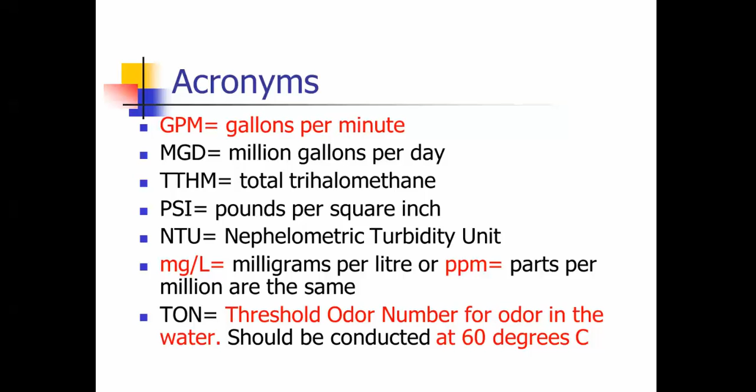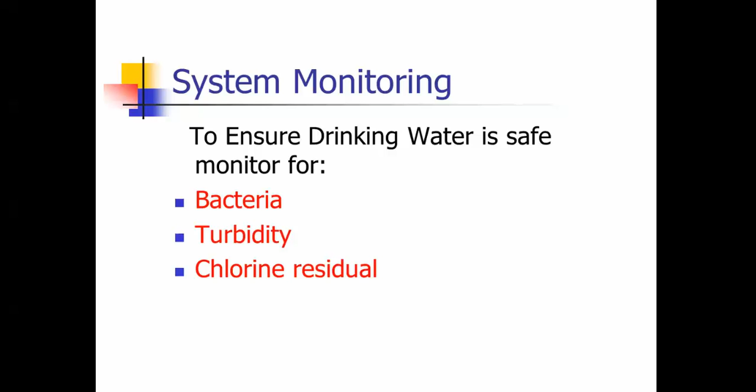When you're monitoring your system to ensure the water is safe, you're going to monitor it for bacteria, turbidity, and chlorine residual. When you take your samples, they should be filled just above the fill line, or about 1 inch from the top. That is a test question.

The bottles need to be sterilized by the lab and ready to use when you take them out into the field. The bottles have a powder in them that's sodium thiosulfate, and that powder is used to neutralize any chlorine in the water.

Your sampling procedures, you should allow the tap water to run for several minutes, or as long as necessary to clear the service line. Generally, when you get a glass of water in the morning, you put your finger under the water and wait till it gets cold, because colder water is better, but that's generally an indication that the water is coming from the distribution main.

You need to know that the results are meaningless if you contaminate the sample, so you don't want to even take the cap off your sample bottle until you're ready to take it, and you don't set the cap down on the ground or touch the inside of it. You want to keep that sample as sterile as possible, keeping your fingers and any contamination out of the cap or the bottle itself.

Make sure the identification cards are filled out completely.

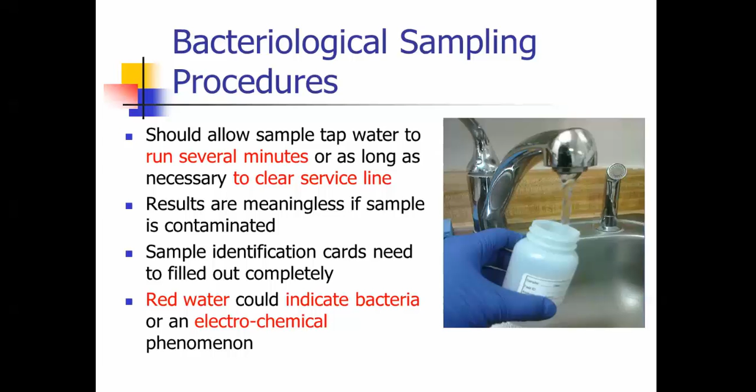And if you have red water, it could indicate bacteria, and could also indicate an electrochemical phenomenon going on in the water.

If you take a sample and the sample was okay, that only means it was safe at the point that you took the sample. They will test that sample for coliform, and that's an indicator of the presence of bacteria in the water. The absence of coliform in the water indicates the water is safe.

The sample should be transported as soon as possible in a cool container with an ice pack, and routine samples should be taken at the customer's tap at various points that represent the entire system. Make sure you also fill out your chain of custody forms completely.

I've got this sample tap over here, and that's not a good place to take a sample. If you'll notice, it's got a hose bib vacuum breaker on it, and there's threads, and those can harbor bacteria on the inside and will mess up your sample.

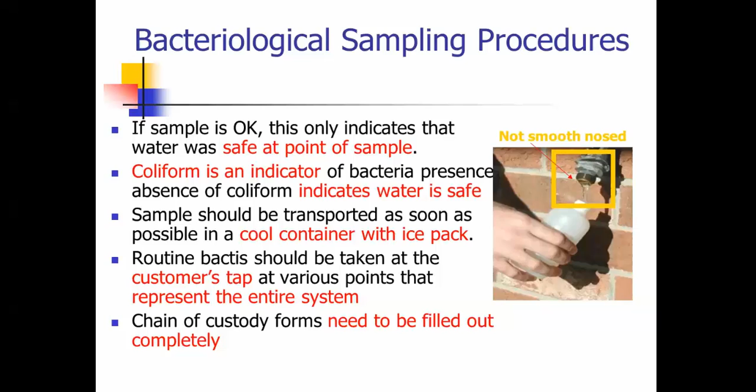Composite samples are a series of grab samples taken at the same sampling point and at different times, and they're mixed together. Grab samples represent instantaneous conditions at the time and location that the sample was taken.

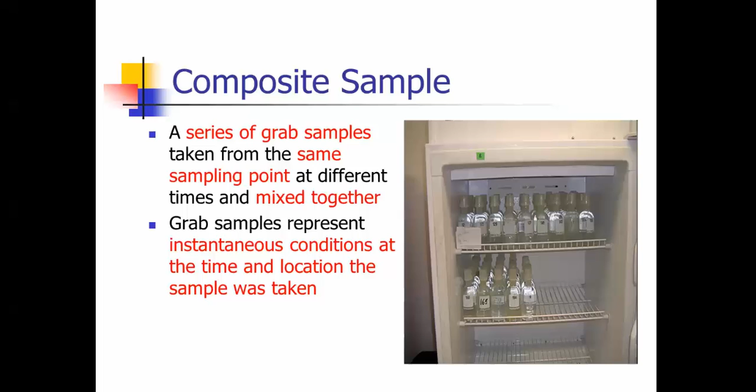Nitrates, we monitor for nitrates. Fertilizing lawns and farms can cause elevated levels of nitrates. They can also cause something known as blue baby syndrome, where the nitrates, if they get into your system, can rob your blood of oxygen, and babies are susceptible to suffocation from nitrates in the water.

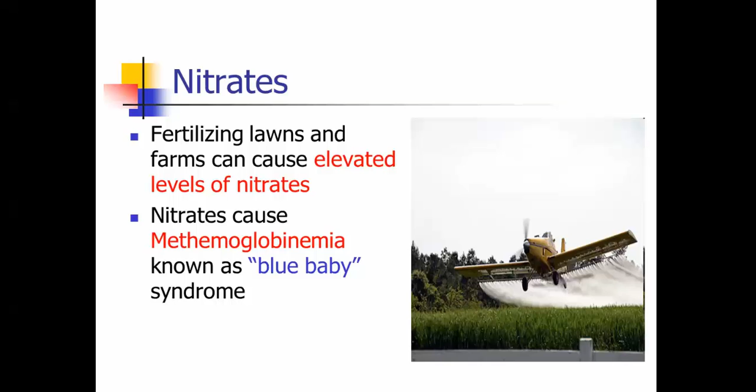NTUs, nephelometric turbidity units, that's the method used to measure the cloudiness of the water. The higher the NTU, the dirtier the water, and the greater the possibility of microbial contamination. Turbidity can mask the bacteria in the water - the bacteria can hide behind the turbidity so the chlorine or UV can't come in contact with it.

I compare this to the middle of summer when it's hot outside and you're trying to find shade to escape the sunlight. It's the same with bacteria - it tries to get in the shade to get away from it.

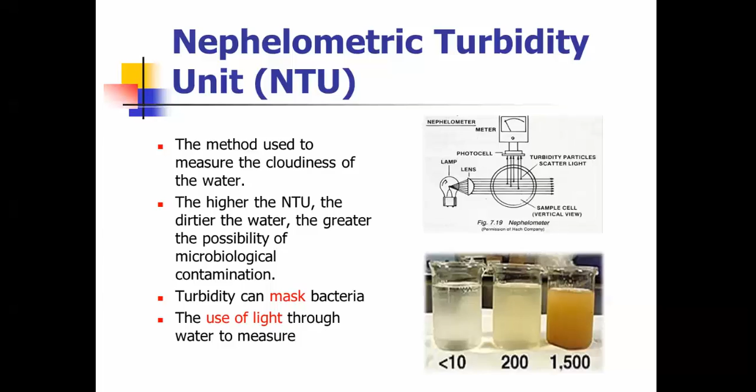They use light refraction to measure the turbidity in the water. Particle counters are a method used to measure the cloudiness of the water, the amount of particles, and the size of the particles. The dirtier the water, the greater the possibility of microbiological contamination.

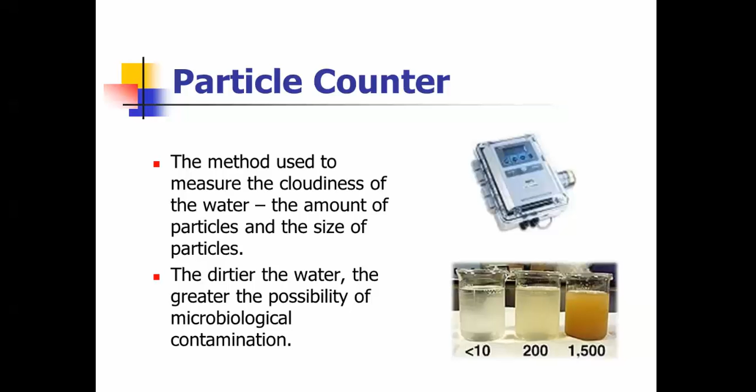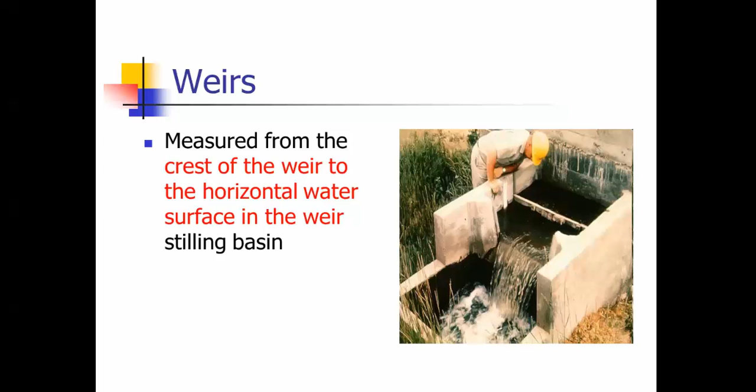Weirs, this is a test question that a lot of people have problems with. It's measured from the crest of the weir to the horizontal water surface in the weir stilling basin.

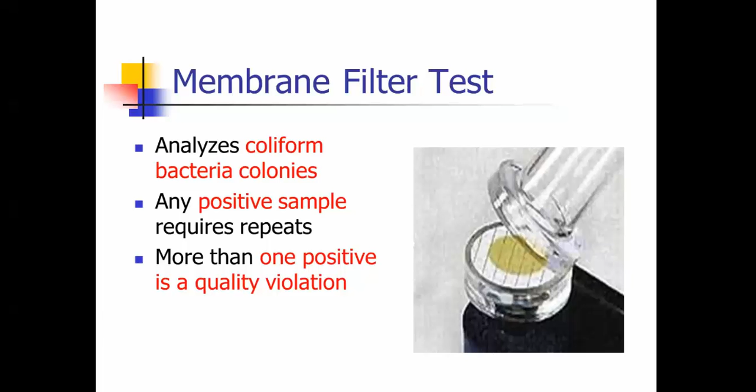The membrane filter test analyzes coliform bacteria colonies. Any positive sample requires repeats, and more than one positive sample is a quality violation.

The groundwater rule went into effect December 1st of 2009, and if you have coliform positive bacteria samples, it requires a triggered source water sample, from all of the sources that were in operation at the time of the coliform positive sample. You can email us on the sources not sampled that were not running at the time.

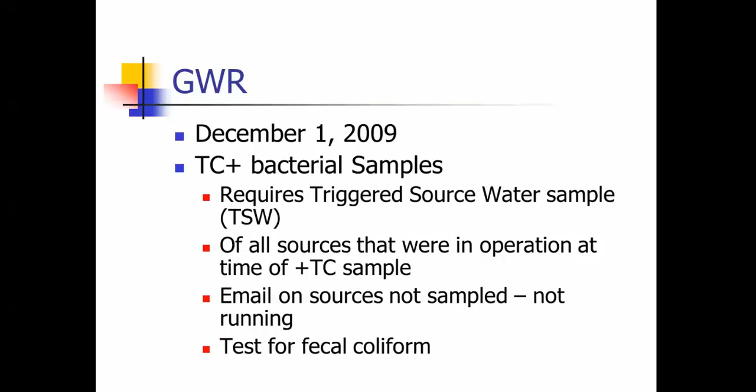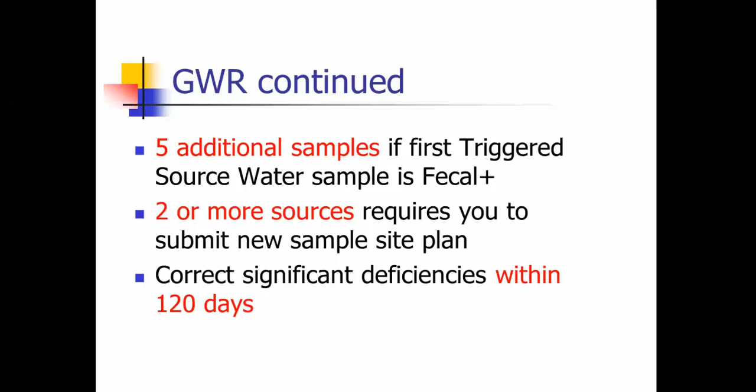Then you test for fecal coliform. If the first triggered source water sample is fecal positive, you need to take 5 additional samples. 2 or more sources requires you submit a new sample site plan, and you have to correct the deficiency within 120 days.

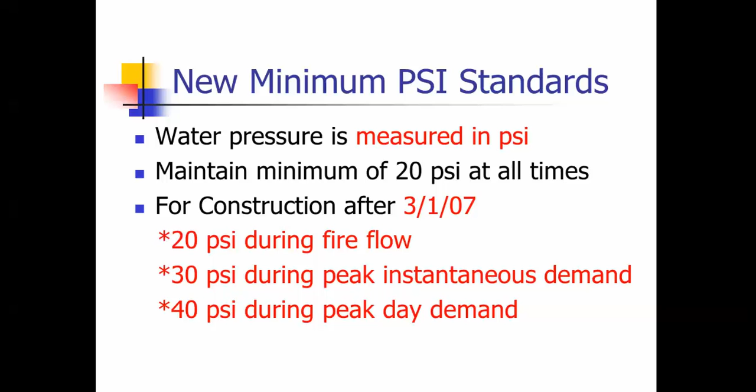The new minimum PSI standards, as of March 1st of 2007, are 20 pounds per square inch during a fire flow. You have to maintain the 20 PSI. During peak instantaneous demand it's 30 PSI, and peak daily demand is 40 PSI. The pressure of water is measured in pounds per square inch, or PSI.

Sanitary surveys are performed every 3 years. Division of Drinking Water personnel, district engineers, local health departments, Forest Service engineers, rural water staff or consulting engineers, or anybody authorized by the executive secretary or director of drinking water can perform a sanitary survey.

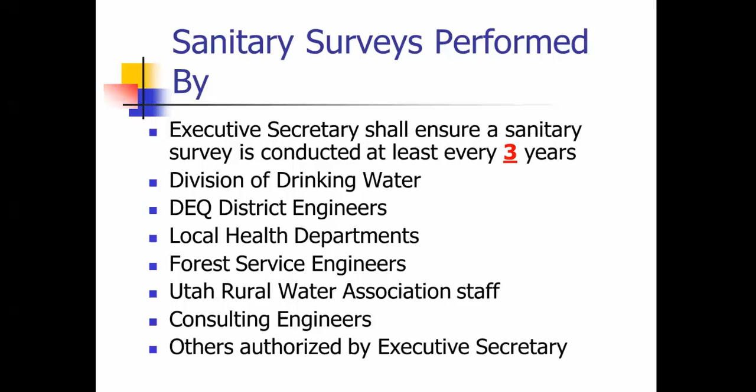Aesthetics means that the water is attractive or appealing. With respect to water, it has to do with taste, odor, and color. Things that affect this are hardness and total dissolved solids, or TDS.

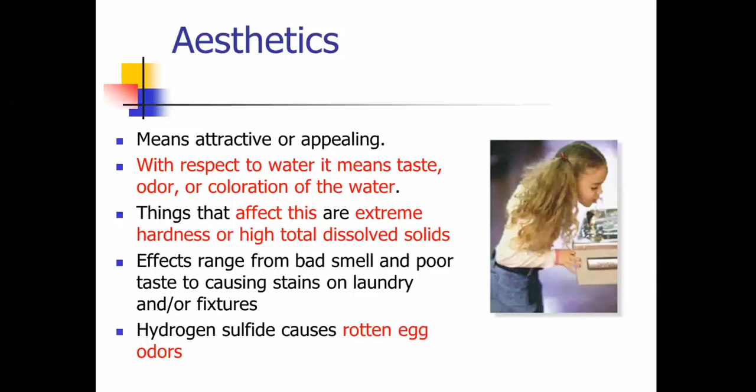The effects of that range from a bad smell or poor taste. They can cause stains on your laundry and fixtures. If you smell rotten eggs, that's generally hydrogen sulfide causing that in the water.

Water storage reservoirs provide adequate water during peak demands. They provide adequate pressure throughout the water system. They need to be covered, by rule, to prevent algae and bacterial growth. They also serve as reserve storage, providing adequate pressure and volume for fighting fires.

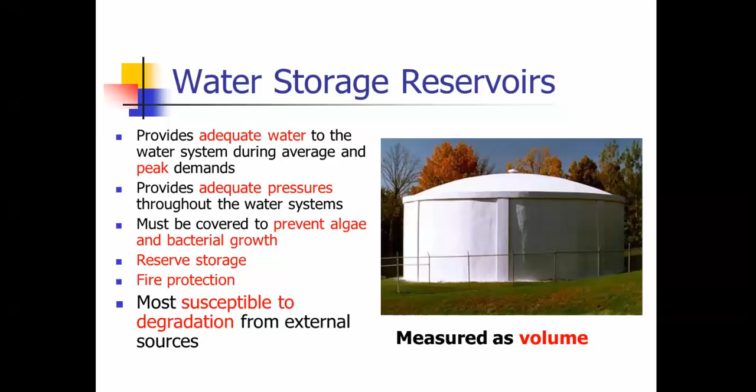These storage reservoirs are most susceptible to degradation from external sources. The volume of the tank, or the amount of water, is measured as volume.

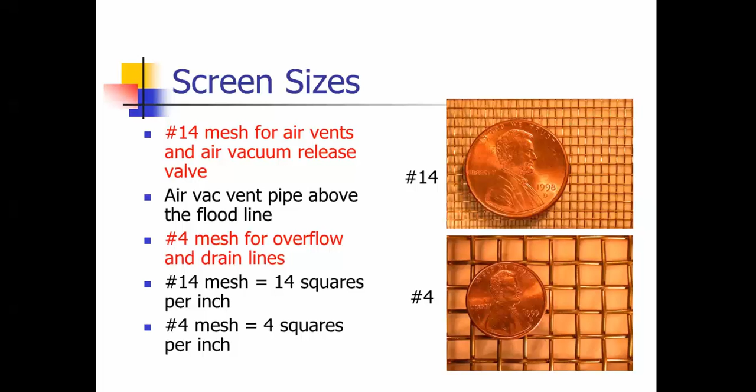Screen sizes: number 14 mesh for air vents, that's 14 squares per linear inch. Air vac vent pipes should be above the flood line, so it needs to be a gooseneck, downturned and above areas where it's possible to flood. They use a number 4 mesh screen, or 4 squares per linear inch, for overflow lines where water can come through. So those are your screen sizes.

Pressure tanks are your hydropneumatic tanks. They should be able to discharge at the pumping rate on your blow-offs. If you have frequent on and off cycling of the booster pump, that shows a lack of air in the tank, meaning it's waterlogged. That is a test question.

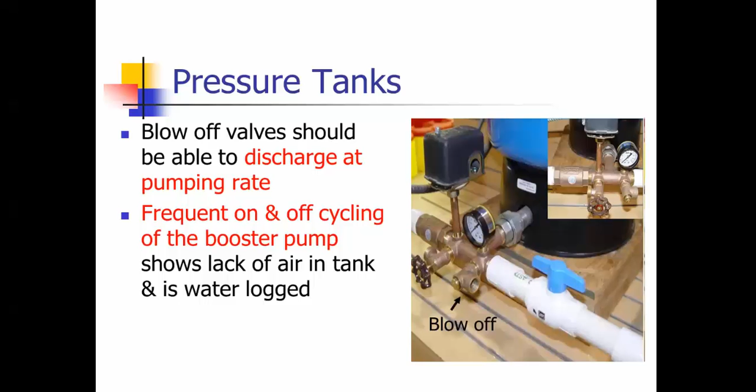For water or reservoir maintenance, you should do a comprehensive inspection when you clean the inside of the tank, and this should be done every 3 to 5 years or more frequently if possible. You want to make any repairs, inspect the inside of the tank, disinfect it when you're done, and take your bacT samples to ensure you've got good water in that tank.

You also want to inspect your air vents on those tanks for ice in the wintertime. They can ice over, and if you have a sudden draw in the tank, you can collapse it, as in this picture you see on the right.

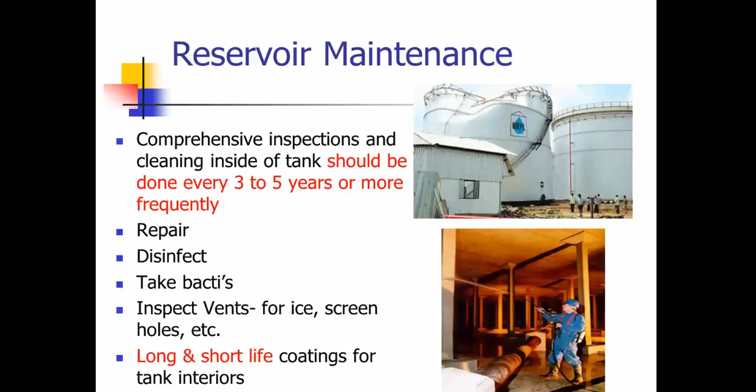For coatings on the inside of the tank, there's long and short life. There's a test question on the types of coatings, and the answers are long and short life coatings.

Surface water reservoirs, the main reason is for turnover. The main reason for turnover is a change in the surface water temperature and density. They act as a pre-sedimentation basin, so that a lot of the particulate matter settles out into the surface water reservoir.

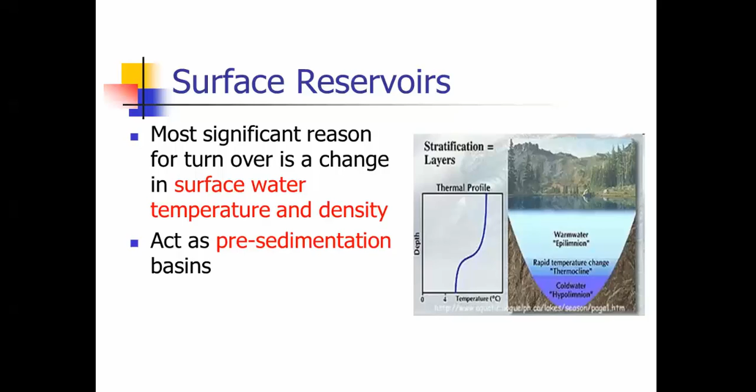The SCBA, the self-contained breathing apparatus, you should always use that when you have gas leaks and in oxygen deficient areas. You should always have an SCBA on. If you use a canister mask when you're in a room and you get a chlorine leak or a gas leak, you want to exit the room and put on an SCBA. Don't stay in the room with the canister type mask.

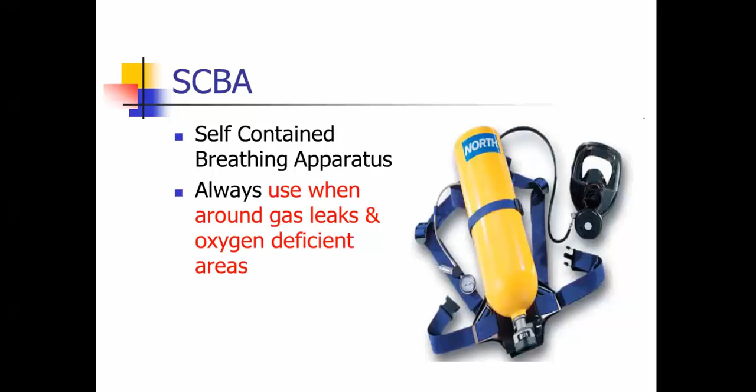Confined spaces, reservoir entry sites are confined spaces. Places where chemicals are stored are confined spaces.

Another thing you want to be careful of is you want to make sure that if you're parked around a manhole, you want to turn your vehicle off, because the carbon monoxide can work its way down into the tank. The minimum oxygen level is 19.5%. Remember that for the exam, because you may see that.

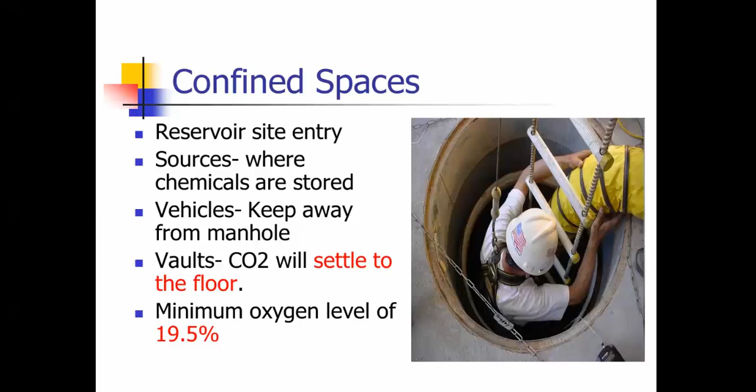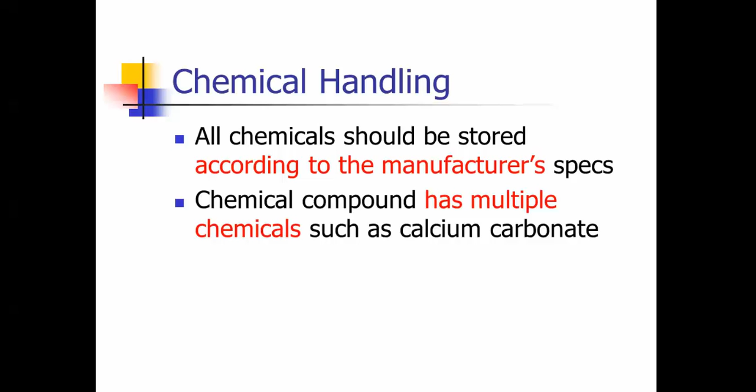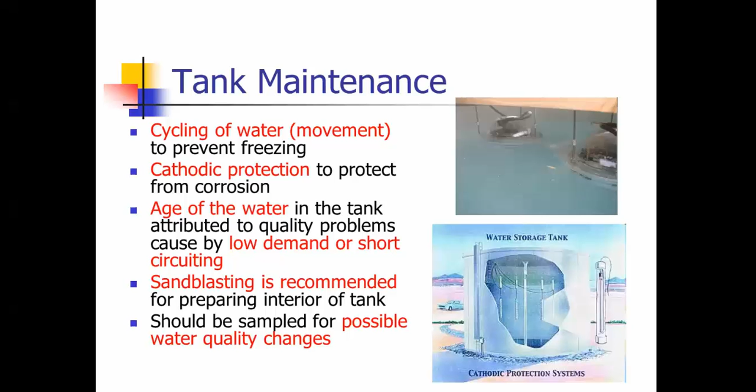If you have to go in and do repairs on the tank to paint them, they recommend sandblasting for preparing the interior of the tank. It should be sampled for possible water quality changes periodically.

When you disinfect a tank, it should be disinfected after you've cleaned it, repaired it, and painted it. It should be disinfected as per American Water Works Association Standards C652.

A full tank, you can disinfect it, a full reservoir at 10 parts per million for 24 hours, or 6 hours to 24 hours. Spraying the interior of the tank, you can do that with 200 parts per million, and you need to let it sit for 30 minutes.

You can fill it 5% at 50 parts per million for 6 hours, and then fill the rest of the tank with less than 2 parts per million for 24 hours. At least one bac-T sample should be taken.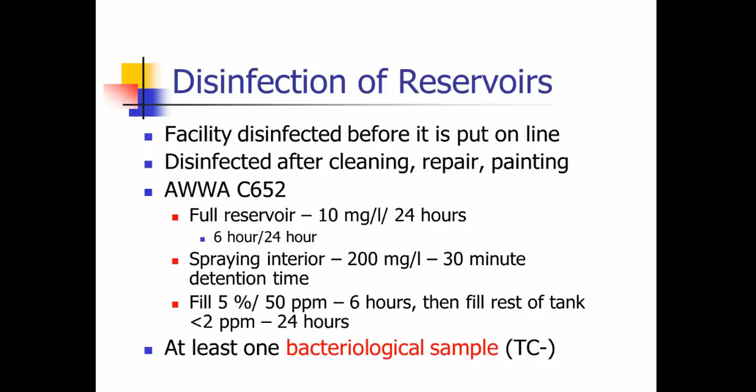When you have a distribution system, the leaks generally get worse. That's on the test. When you do a water audit, what you're trying to identify is water and revenue losses. Leak surveys should be done during low flows.

If you have a cracked main, it should be replaced. Pressures can be measured at a fire hydrant or a pressure regulating station. Your distribution system pressures should be 20 PSI at all times, and the minimum water main size is 8 inches with fire hydrants, unless you have an engineer that will buy off on it, and then 4 inches without fire hydrants.

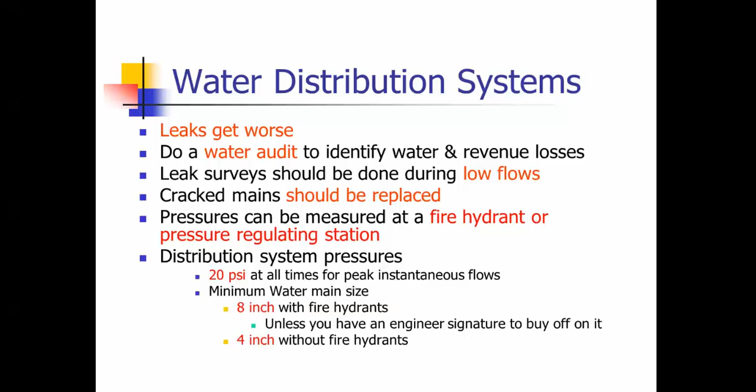Water mains need to be 10 feet of horizontal distance from the sewer main. If you cross a water and a sewer main, there needs to be at least 18 inches of separation between the two, and the water line needs to be on top. Water and sewer cannot be installed in the same trench.

If you get anaerobic growth, that develops in water devoid of oxygen, and that causes odor problems. The hydraulic adequacy is determined by the pressure measurements throughout the system at various times. If you loop a system, you loop it to prevent dead ends and water quality problems, and also for better flows.

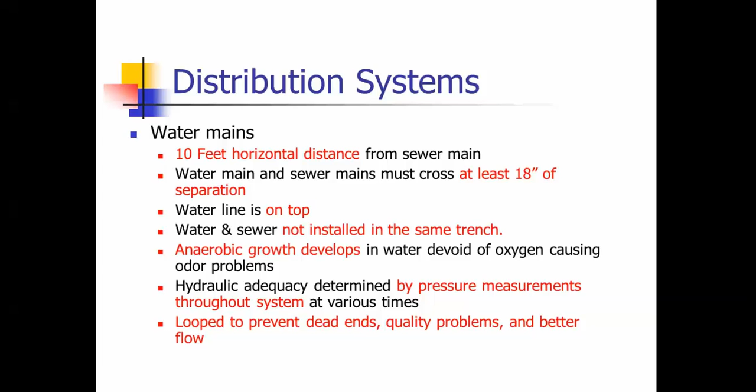A Corp Stop is a customer service line, and it's used to shut off the service to a home or one of your residents or businesses. 3/4 inch is the most common customer service connection.

You can thaw a service line with hot water or warm air. You don't want to use a welder because you can create a fire in somebody's electrical panels. And you should also consider flow rate and pressure for sizing. Whenever you're sizing that service connection, flow rate and pressure are a consideration.

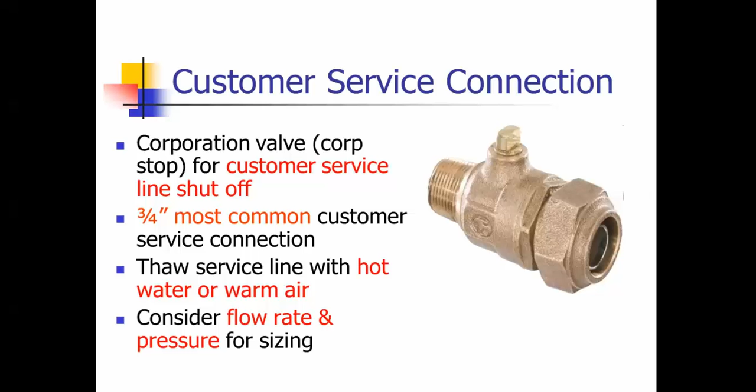Jacking and boring is the most common technique for the construction of a pipeline. If it has to go under a freeway or heavily traveled road, they call it jacking and boring, and what they do is push the line underneath there without having to dig up the road.

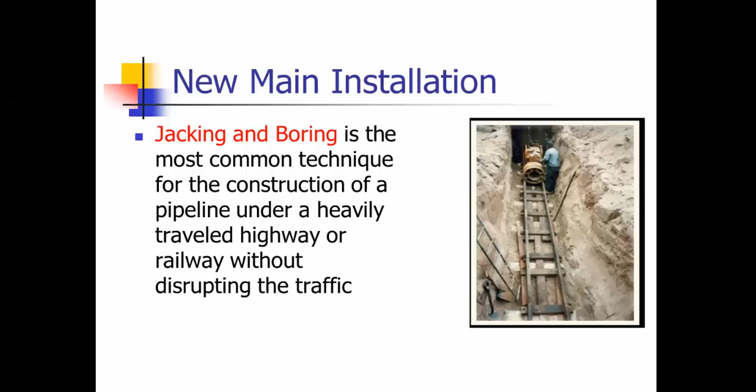On your new water mains, there are certain steps that you need to take. You should pressure and leak test the new main, flush out any debris in the line, and keep that pipe clean. Then you disinfect that pipe with AWWA Standard C651.

You want to take a chlorine residual, then flush the highly chlorinated water out. Make sure you don't flush it into a storm drain that leads to a river, because you will have fish kill. Your bacteria samples should be taken at least 24 hours apart under special conditions, and you want to keep the ends of the pipe plugged when they're unmanned so animals and varmints can't get inside the pipeline and get trapped.

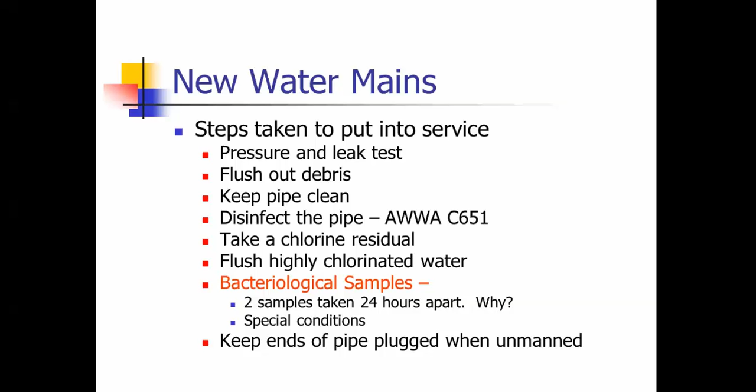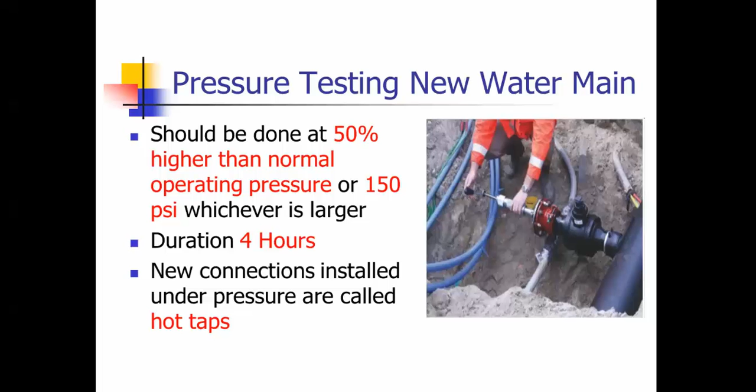Pressure testing the water main should be done at 50% higher than the normal operating pressure, or 150 PSI, whichever is larger. You want to test it for 4 hours. New connections installed under pressure are called hot taps.

You never want to shut the main line down completely, because you can create a back siphonage in the line and suck contamination into it.

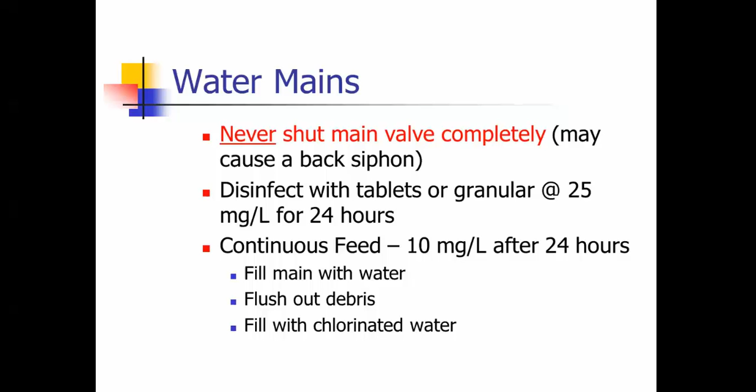You want to disinfect with tablets or granular chlorine at 25 parts per million for 24 hours. With continuous feed, you can do that at 10 parts per million after 24 hours. Fill the main with water, flush out any debris, and fill with chlorinated water.

Backfilling the mains, notify other utilities or blue stakes before you dig. The soil should be placed equally on both sides of the pipe halfway up, and you should hand tamp the soil. The pipe should be covered with about 12 inches of soil.

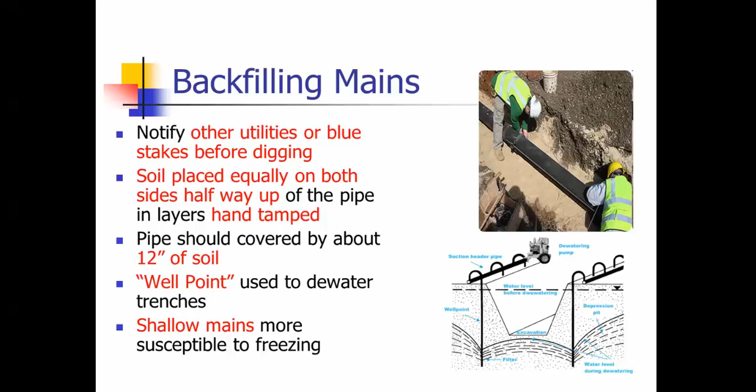A well point is used to dewater the trenches. You need to know that shallow mains are more susceptible to freezing, that's why they try to bury them below the frost line.

Thrust blocking is a concrete mass. You can see that right here on the tee, and they place that to keep the fitting from moving and coming apart. You can also use thrust anchors when thrust blocks can't be used. You can use a restrained fitting or clamps, and you can also use tie rods on a mechanical joint fitting.

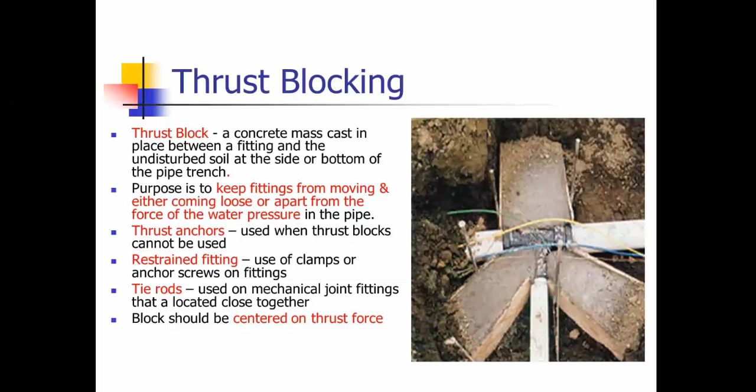The block should be centered to keep where the force is going to be, to keep the fitting from moving. The thrust block should be placed behind the foot of the hydrant at the flow line.

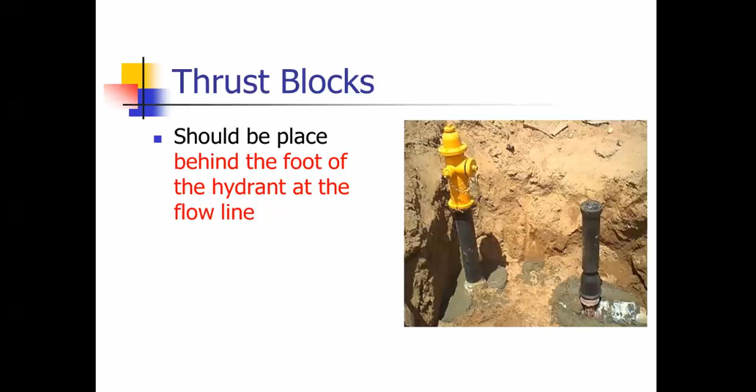Fire hydrants: the hydrant bury is the distance below the ground to the main connection. Because of increased population, growth, and scaling of pipes, hydrant flow tests should be performed periodically after major changes in the distribution system.

You can also take a cap off and drop a weighted string down to make sure that your valve isn't leaking inside the hydrant.

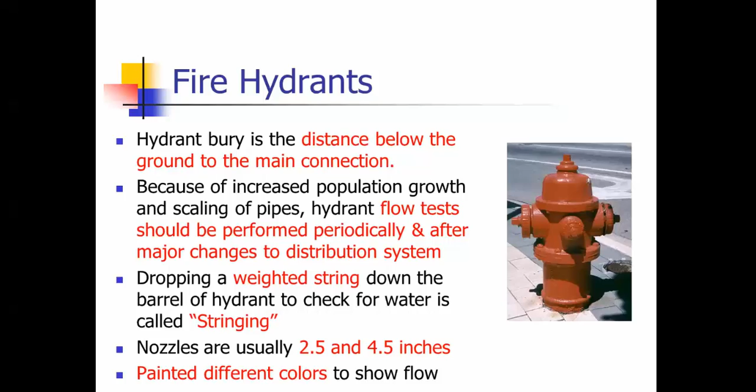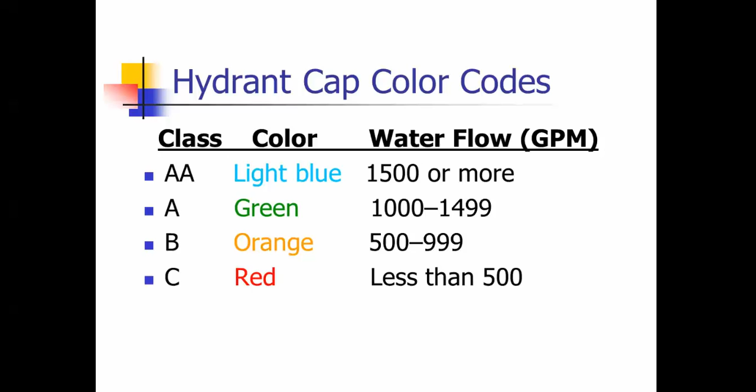Nozzles are usually 2.5 to 4.5 inches, and they paint them different colors to show the flow. The hydrant cap color light blue is 1,500 gallons per minute or more, green is 1,000 to 1,499, orange is 500 to 999 gallons a minute, and red is less than 500 gallons per minute.

When you flush the hydrants, you can stir up silt in the line, and that causes water quality problems. They should be tested for flow with a pitot gauge to make sure you have an adequate flow, so if you have to fight a fire, there's adequate flow for the firefighters.

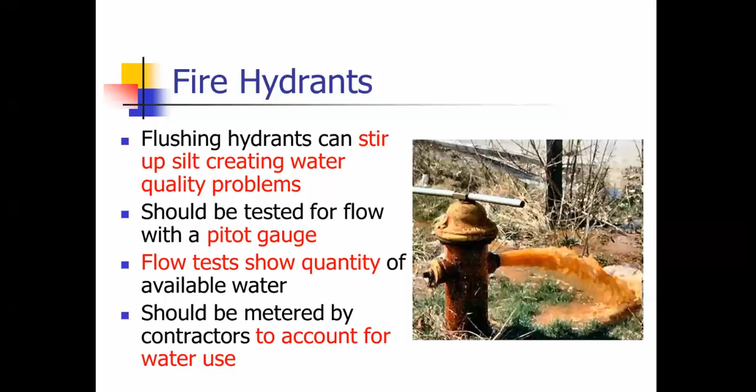And they should be metered by contractors. If you have a contractor that hooks onto a hydrant to fill a tanker or anything like that, you should require them to put a meter on it so you can account for any water loss or water use.

On a dry barrel hydrant, the hole drains the barrel. There's a hole in the bottom, a drain hole, and that drains the hydrant barrel down so it doesn't freeze.

You test those for leakage with the main valve open and the caps on. You can use a listening device to check for leaking water across the seat, and then the operating valve is located at the base of the hydrant.

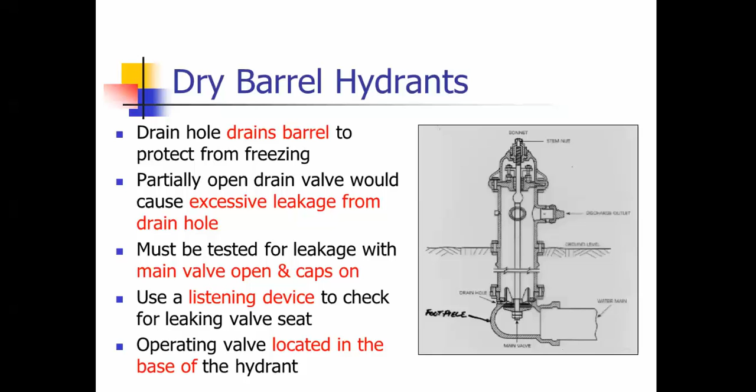Flush hydrants, a lot of people miss this. One of the wrong answers on the test is that flush hydrants are for flushing. What flush means is they're flush against a wall or the ground, and they use those where post hydrants are not suitable.

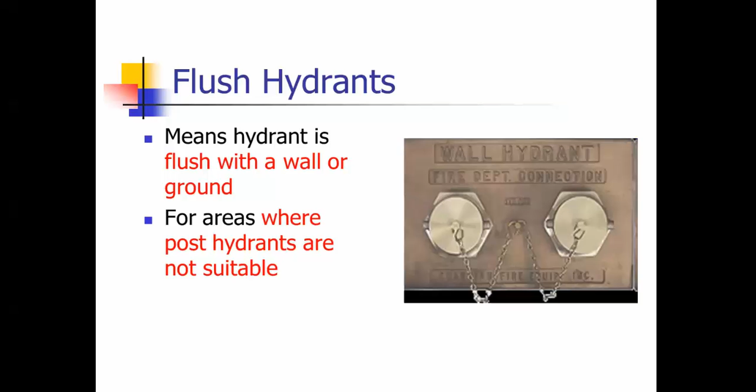When you flush the system, periodically you want to flush your dead end systems. A good time of year is when flows start to back off, like in the fall or spring. During periods of low flow, flushing keeps the water moving in the system. Dead end systems can cause water quality issues, so that's another time to flush.

Also, when you have a water quality issue, that's another time to flush the main. When you get customer complaints, that's another time you want to flush. You need to be careful of environmental concerns. This thing attached to this hydrant is a mechanism or apparatus used to dechlorinate the lines.

You can see the little white cap on top of it, and that's where they put the tablets in, so as the water passes through it, it dechlorinates the water, so that any water going downstream into a river won't cause a fish kill.

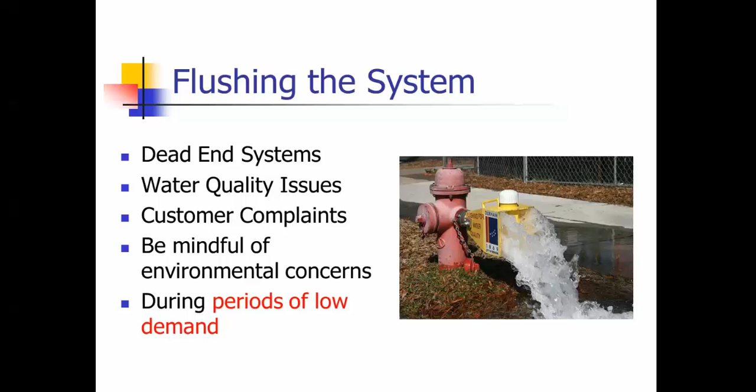Also, during periods of low demand is when you want to flush your hydrants. You want to notify the customers through their billing, letting them know when you'll be flushing the line, so you don't get a large amount of calls into your main office complaining that the water's dirty or has the appearance of rust. If customers know you're flushing and why, that will minimize the calls.

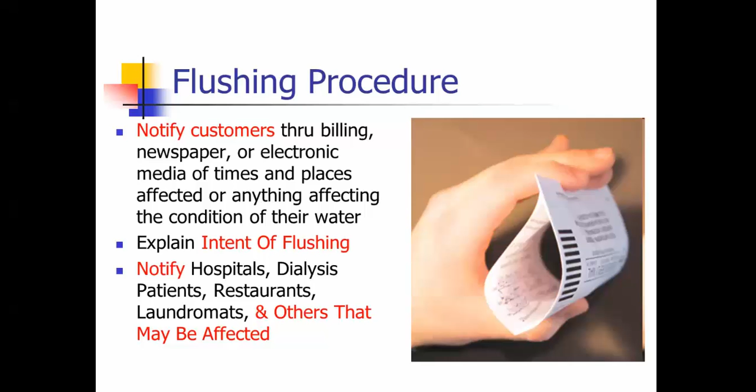Also, you want to notify your hospitals, dialysis patients, and others that need clean water that you're going to be doing that, and let them know they can let their tap run until it clears up, and anybody else that may be affected.

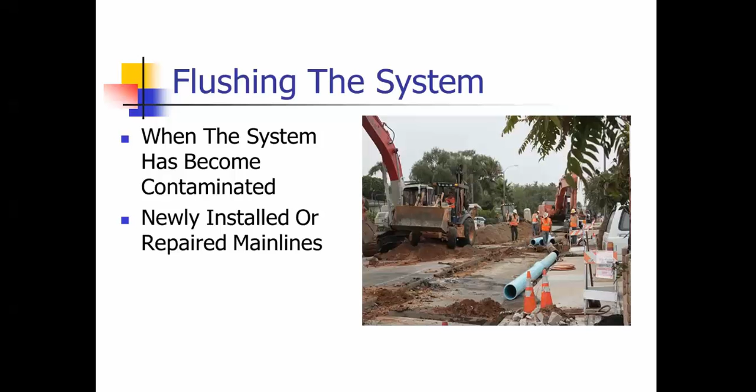When you flush the system, you want to flush it when the system's been contaminated, or whenever you've installed new or repaired main lines. Flushing the hydrant helps remove taste and odor causing deposits, helps remove encrustations that may restrict flow, and helps remove rust and other causes of water quality problems.

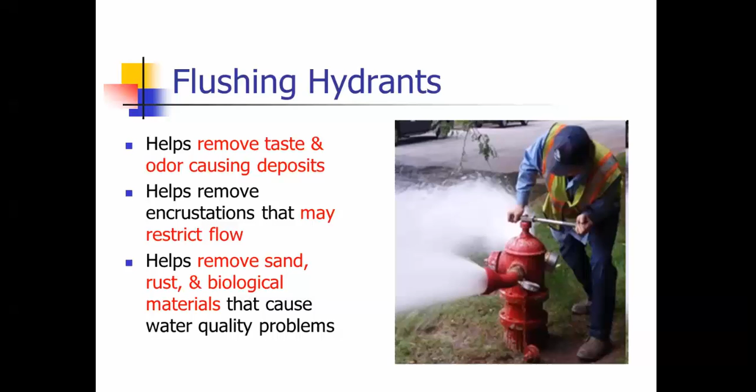With the flushing procedure, you want to avoid traffic areas, and especially avoid flushing in wintertime in freezing conditions because you may cause accidents. You want to open the hydrant fully for 5 to 10 minutes to stir up the deposits. Don't let any nearby areas drop below 20 psi.

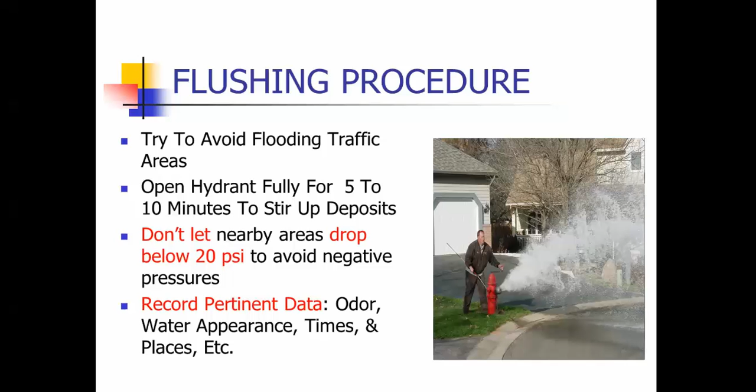You have to maintain at least 20 psi at all times in your system. And then you want to record pertinent data like odor, water appearance, and the times and places that you were doing the flushing.

Firefighters—if you have several firefighters hooked to a main line through your hydrants, you can create a negative pressure. Dead-end systems will likely have inadequate flow for firemen, so you need to be mindful of that. Firefighters should know it's a dead-end system and may experience problems, so you ought to communicate with your firefighters and let them know.

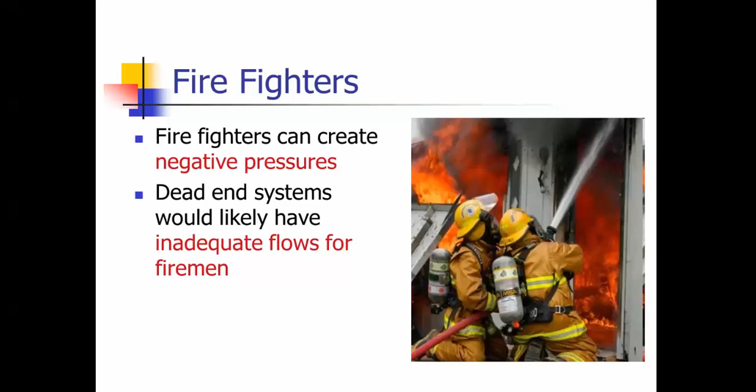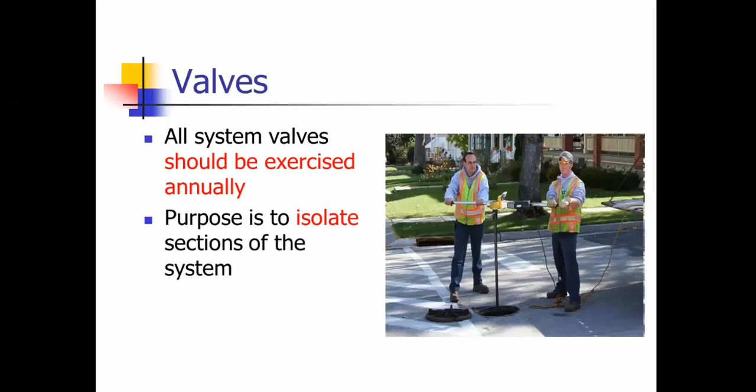Generally, you'll have a gate valve down there on the main line, mainly used to isolate, and they should be open all the way. Gate valves are the most commonly used valve in a distribution system. They're for isolation purposes only. They need to be either all the way open or all closed.